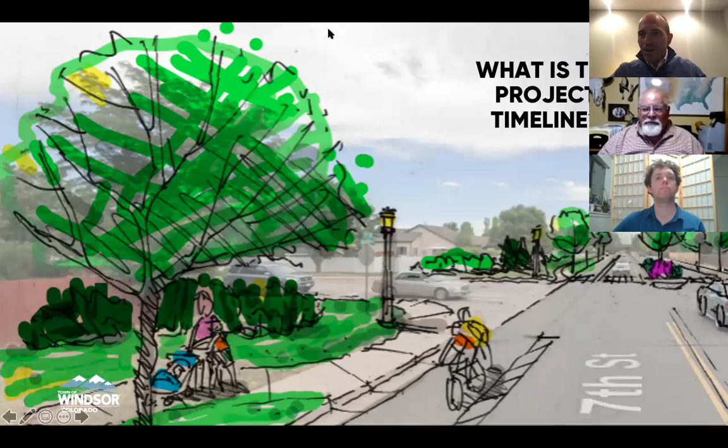Okay, so what is the timeline for this project? Carlos, what's going on with this? How long is it going to take? What are you doing? What are you not doing? So we have a schedule here. This is also going to be on the website, on the corner of the page, if you navigate to it. We just launched the project in August.

So we started in August, talking about goals during that session, starting to get existing conditions, and starting to talk about the measures by which we'll evaluate the ideas that come up during this project. We moved into September and really started thinking about options, ideas, and existing conditions for the corridor. We're doing that tonight with you. We're talking about your experiences. We want to hear from you about what it's like out there. What have you seen change over time? What would you like to see changed in the future? How are things going out there?

November 9th, which is a Monday, we're meeting with the town board to give them an update on the goals for this project, what we've heard from the community, and the existing conditions.

From there, after November 9th, we are working all of November and all of December on ideas and options. At this point, we don't have any options available. We haven't designed anything yet. It's premature to do that because we haven't heard from you, the community, and we don't have all of the existing conditions information yet. There have been some posts on social media about ideas and solutions we supposedly have, but we are far from that place.

We will be at that place in December. We will have another set of meetings like this in December, where any preliminary ideas we have will be previewed in this venue and format. Then we'll hear from you about what you think. And then we'll have another meeting in January where we show you the refined designs based on your input.

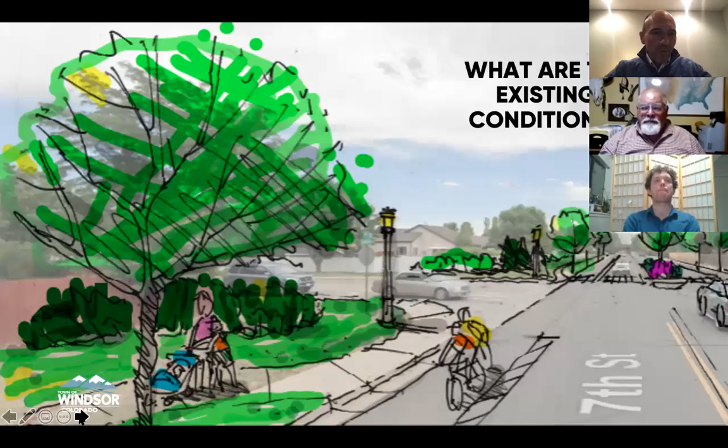So with that, now you are all reasonably versed in the timeline and what's going on. A lot of that information is on the website as well, so you can go check it out, and you can also replay this video if you wanted to know more.

What we're going to do next, for about 15 to 17 minutes if we're good, is go through the existing conditions in the corridor, and then we're going to ask you some polling questions about those existing conditions. Remember, during this existing conditions presentation, if you have questions about anything you see, feel free to add them into the question and answer think bubbles up at the top.

And Paul and Bill, I just want to make sure you can hear me okay and you can see the slides okay — they're presenting through. Thumbs up. Cool.

All right, so I think it's important with a corridor study like this to start with the history. And it's really interesting because this corridor has been changing for over 100 years. So there's been a lot going on.

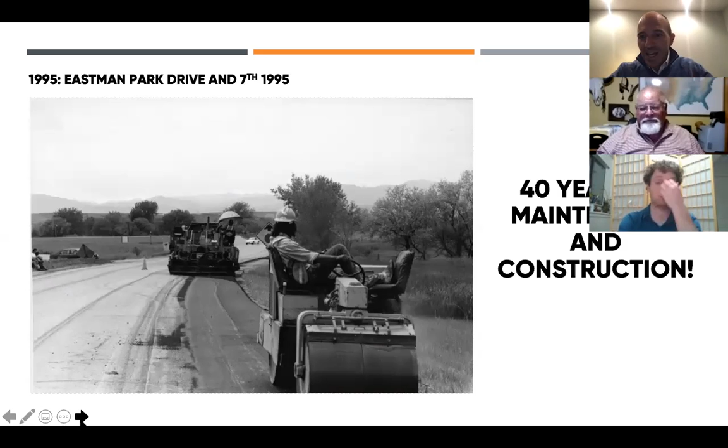From the 60s up until about the mid 90s, you see a lot of those visions being implemented. So in 1995, some new paving going on down south, and a lot of maintenance and construction occurs. That was a quick summary of the last 100 years of a lot of change, things moving and evolving in a way that there was a lot of debate about. I presume moving forward with this project, there'll be that similar kind of conversation - it's normal, it's not the first time that's happened in this corridor.

Our anchor for what we're doing moving forward is the Transportation Master Plan. I'm not sure if anybody on this webinar participated in that, but it was prepared over the last year and was actually adopted right before COVID really got going - adopted in March of this year. It will guide the next 20 years of transportation investment in the town. A couple of graphics on that so you know about this, and FYI, the Transportation Master Plan is on our website - you can get to it, download it, it's a PDF, reasonably easy to read.

In that Transportation Master Plan, the most important thing recommended as a priority was safety. Regardless of any mode of travel, the number one goal is that everybody gets home, everybody gets to work, everybody gets to school, everybody gets to the donut shop in a way that is safe and allows them to enjoy this community. That is a fundamental goal we are going to pivot from. There are two other things that showed up in the Transportation Master Plan worth noting: it's worth noting that our area, the 7th and Main area, 7th and Walnut areas, were noted as pedestrian priority zones.

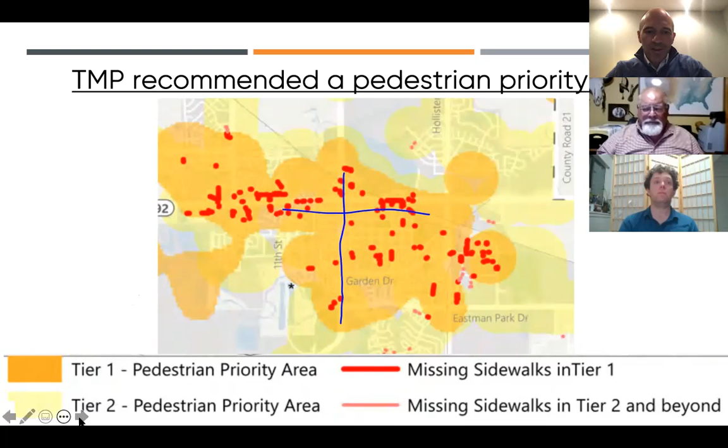So here's 7th Street here, and then the Walnut corridor is kind of living in there. We don't have too many missing sidewalks in our zone, but it was designated in the Transportation Master Plan as a pedestrian priority area.

The other thing noted in the Transportation Master Plan was new bike lanes. It was recommended to have bike lanes on 7th, and that Walnut Street corridor have new bike lanes, and possibly bike boulevards along Walnut. In addition, there could be a connection up to Main and some form of bike connection near Main. So the Transportation Master Plan was a little bit clearer in terms of these corridors and designs they wanted to see move forward.

Why is that important? Well, Main Street's the key to life in Windsor. A lot of things that happen in Windsor happen along Main Street. Donuts and food and schools and great burgers and paint and coffee and haircuts, everything we love to do lives along Main Street.

In addition, a lot of the population lives in this zone that's, as a crow would fly, walkable and bikeable to these spaces. That doesn't mean everybody's going to do that, or that you have to do it for every trip. But there is a lot of Windsor's population, a good half of it, that lives a really short distance to all these things going on.

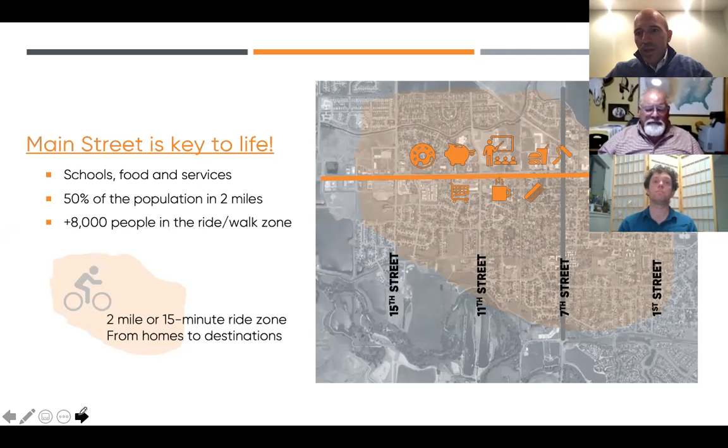And so the Transportation Master Plan said 7th Street and Walnut Street should be connecting to these areas.

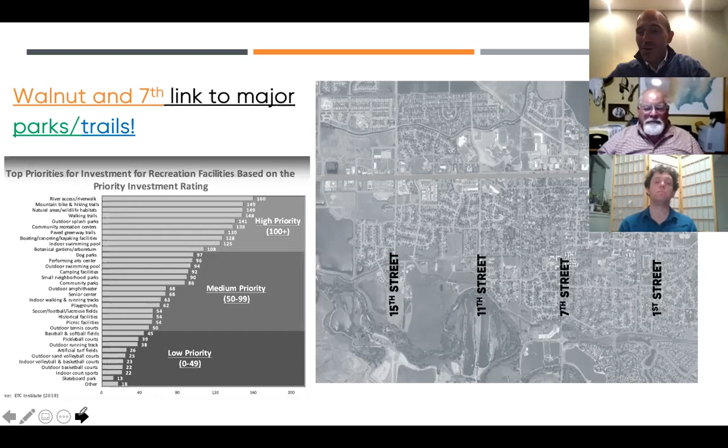In addition, if you've participated in the recently adopted Open Space and Trails Master Plan, you'll see two of the top priorities, really four of them, are access to the river walks and natural areas, being able to ride your bike, being able to walk and get out in nature. This was before COVID, so even more so now people want to be out. You have these two great regional trail connections and these great public spaces to be in, but you somehow have to get there from these neighborhoods.

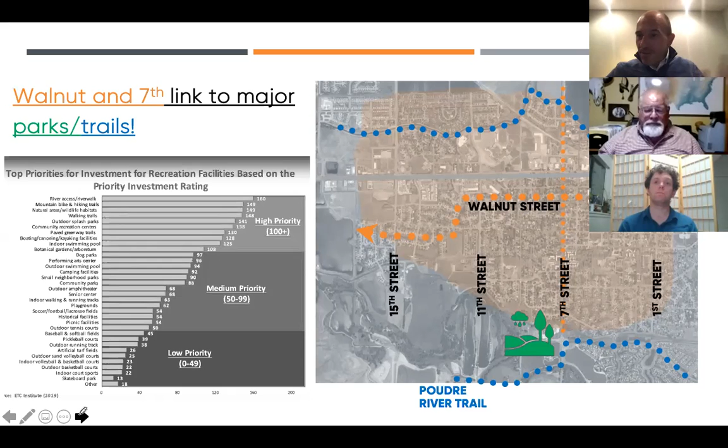So if you look at a third of Windsor's population and where they live, and then the preferences not only from the Transportation Master Plan but from the Trails and Parks Master Plan, people are saying we want to be connected, we want to get to these spaces. So 7th Street and Walnut Street are absolutely critical to make better connections, to make them safer, and to ensure everybody has a space and is paying attention to one another while they're out there.

So here are the high level points, and then I'm going to pass it over to Bill, and he's going to jump into details. If you love the bullet points and want to stay at the high level, these next two are for you. If you love all the details and want to see all the numbers, Bill is going to make your evening because he's going to show you all those good facts.

So what about 7th Street? On the high level, 7th Street is posted 30 miles an hour. We're going to show you how fast, or how naughty or good people are with that, in a minute, but it's posted 30. There's no protected place to ride in the corridor. So if you wanted to ride north or south to Eastman Park to get a donut, or get that paintbrush for your project, or just go to a music concert, there's no place to ride in that corridor. The sidewalks are there, but there's no buffer.

Paul and I were out putting those signs in the ground that you may have seen on 7th Street, and when you're standing out there, the sidewalk's right next to the travel lanes in some cases. It's near parking in some places, but some of the parking isn't as utilized, so you're really feeling a lot of the vehicles as they move by. If you want to walk and cross the street, sometimes you have to walk a couple blocks in either direction to make that crossing because the crosswalks are infrequent.

There are a lot of crashes in this corridor relative to Windsor—Bill's going to talk about that, so just be aware of it. We talked about the connections to open space and downtown, and the mayor talked about that in the video. 7th Street's the lifeblood—it's been that way for 100 years, as we learned about tonight.

And more importantly, we think that this is a corridor that has a lot of different unique neighborhoods along there that should be celebrated. And then lastly, for my part, Walnut.

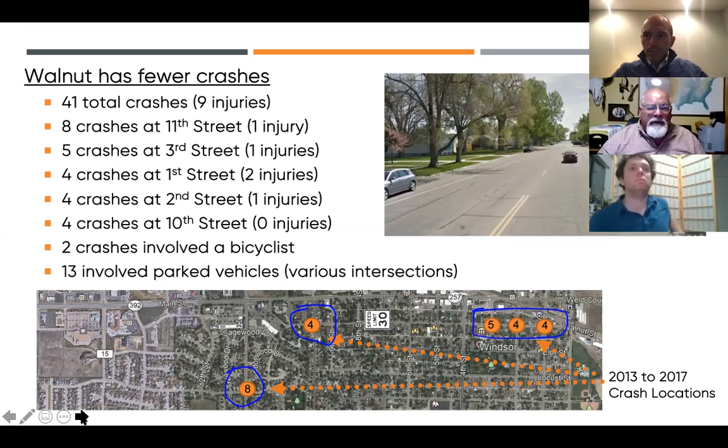2 of the crashes involved bicycles in this corridor, and one interesting thing was 13 of the crashes involved parking and parking maneuvers and parked vehicles. And that's maybe not a surprise given some of the angle parking and the demand for parking that occurs, particularly east of 7th along Walnut.

So how about traffic? We're going to talk about daily traffic and then a little bit about peak hour traffic. Over the course of the day on 7th Street, there's somewhere between, say, 8,000 and 12,000 vehicles a day. That, depending on your perspective, is either a big number or a little number, but when you think about the capacity of this roadway to carry traffic, it's probably somewhere between 15 and 20,000 vehicles a day. So we're not near capacity, and it's important to note that this roadway is not going to need to be widened for additional automobile lanes in the future.

We measure traffic delay or traffic operations using a concept called level of service. We give it a letter grade like a report card, A through F. The overall intersection has a level of service C, which is pretty good, but we know the northbound left turn is in the E range, so very congested trying to turn left.

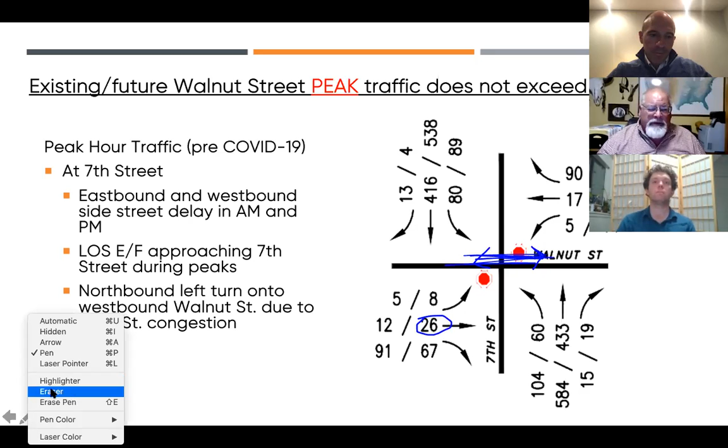And what are they doing? The Stone Mountain folks are probably going over to 11th to get up to the traffic signal at Main Street, or get to the school, or whatever. But they're diverting off of 7th because it's easier to go on an alternative route. So we see those diversions happening.

As far as the speed in these corridors, we measured the speed over a 24-hour period at a number of locations on each corridor. What we saw on 7th is that south of Main Street, the speed limit is 30, and yet the 85th percentile speed we measure - simply the speed that 15% of folks are going faster than - tends to be 6 miles an hour over the speed limit. That's an indication to us as traffic engineers that you probably want to think about ways to mitigate speed in that corridor.

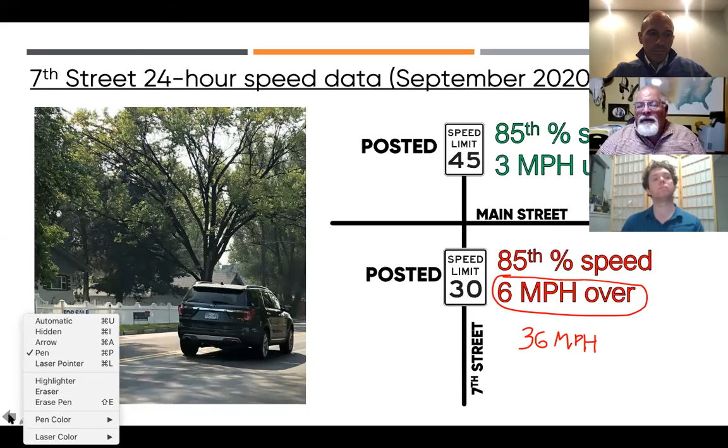North of Main Street on 7th, there's a different condition. The speed limit actually is 45, and people were actually driving less than the speed limit, which indicates they didn't feel like it was a corridor where they should be or needed to be traveling at 45 miles an hour. Then on Walnut, similar - 25 miles an hour on the west end of the corridor is the posted speed limit, 30 miles an hour is the speed limit east of 7th.

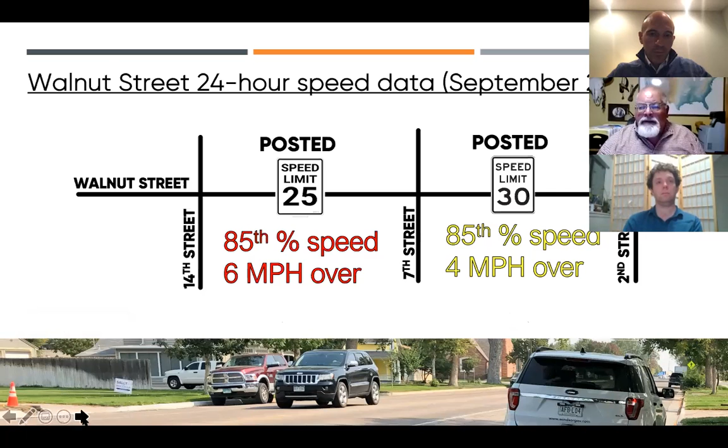On the west end, we saw that 85th percentile speed as 6 miles an hour over the speed limit, 31 miles an hour. On the east end, we saw the 85th percentile speed only 4 miles an hour over the speed limit, but it's 30 to 35 miles an hour in a corridor we want to think about as a comfortable pedestrian and bicycle corridor. So speed is an issue as we think about the designs going forward.

And then just from a bike and pedestrian standpoint, we don't have a lot of detailed numbers for the corridor. We were intending to get those mid-COVID, and that didn't happen, so we don't have detailed information at each intersection.

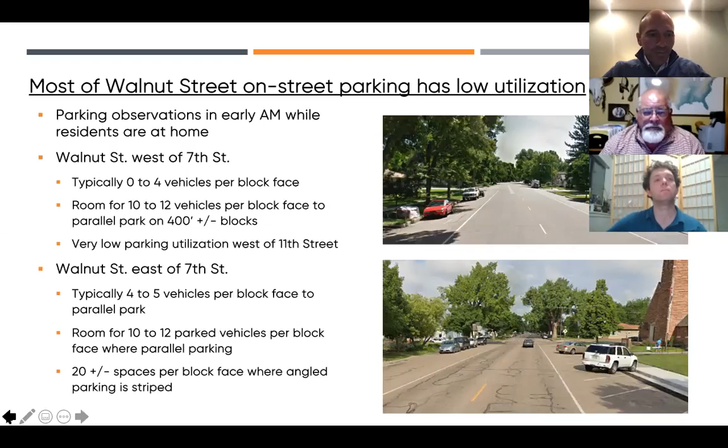The first question for you on Walnut is: when you heard Bill and I talk about the Walnut Street existing conditions data, does it match your experience when you're out there walking, riding, driving, doing whatever you're doing out there, does it?

So first one, yes, a lot of it reflects my experience. Second one, yes, some of it matches my experience. Third one, no, none of this matches my experience, since you're all on Jupiter. And then the last one's, I'm not sure yet, I probably need some more time.

So I'm going to give everybody about 30 seconds to think through that and process that. And then I'm going to end the poll, and then you can all see the results. So we have 9 of 14 people who've contributed to the poll at this point, so I can give you another 15 seconds.

Great, thank you everybody. Okay, I'm going to close the poll, and I'm going to share the results. So sounds like yes, and not everything yes, but pretty close to everything yes.

Okay, that's good. So I'm going to ask you the next question. The next one is, do you agree with the existing conditions data? This is important because when we go forward with the town board, we all have to have a similar set of data points to use to make decisions, right? So the question is, do you agree with this data? Is this data that we should use moving forward in the process?

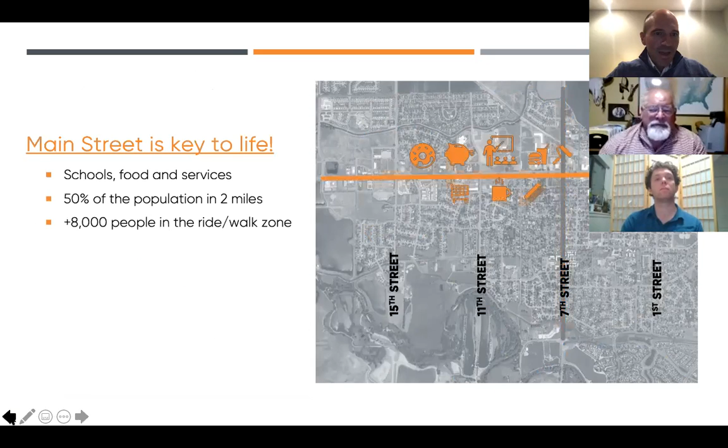Another one says, are you saying that the bike paths will be put on Walnut? So the transportation master plan, I'll go back to that slide for a second. The transportation master plan suggested that Walnut Street has bike lanes. Too many windows open here. So there's existing bike lanes on Walnut Street. They end around 5th Street or so.

So those bike lanes end today. The transportation master plan said, what if you extend those, starting to move west? Once you get west of 9th, what if you went up to Main, or what if you kept going on Walnut? So the transportation master plan left that to be determined, but said those are thought to be recommended there. This process we're going through is trying to figure out what the design is actually going to be. So that's where we are. We're not saying anything yet. We're just showing you what the previous plans have said and trying to get a handle on what's going on out there.

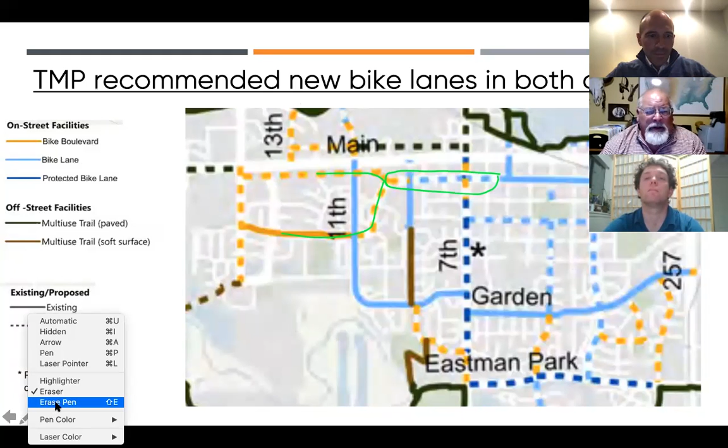Carlos, a couple of new comments. We have concerns about diverting more traffic through Walnut residential areas. That's certainly a concern, and we hear you. Another one was, are you considering affecting parking on Walnut? I do not have a driveway and need to park there, plus the churches need it, and so do the residents at the apartments between 5th and 6th.

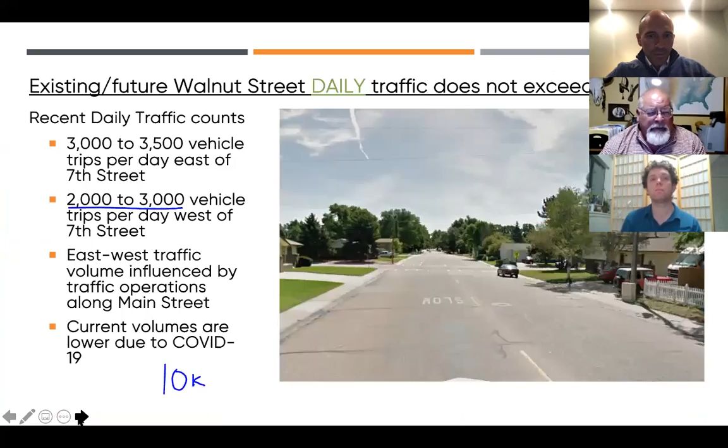I'll read one last one. I live on Walnut Street and see high traffic at times due to Main Street congestion. Are there any plans to reduce truck traffic on Main? Okay, so these are great, we can turn those into, that's an issue you have. We don't have any plans yet. We are literally just at the beginning.

We're hearing what your experience is. So if I was going to, and I hope I don't speak for you, let me know in the chat if this makes sense, but I think I would turn those into: I live along Walnut Street, I see high traffic during times, I'd like to see truck traffic reduced on Main. I'm going to make an assumption there that would happen.

On the next one that came in: I'm concerned that traffic on Walnut Street will increase. So, I'm concerned that your designs will increase traffic, and I presume when you say traffic you mean motor vehicle traffic. But can you clarify if you mean you're concerned that more people will walk or bike on the street, which I don't think is the case, but I just want to clarify when you say more traffic, I presume that means more car traffic.

Bill, there's another one down at the bottom, a couple new ones. Yep, and there's, let's see, I lost it now. Okay, thank you, Cindy, thank you for clarifying that.

Paul, can you speak to the one about the grocery store anchor and traffic? Sure, are there any plans to anchor a grocery store on the east side of town? It appears the increased traffic on Walnut going west off 11th Street is because everyone is using Walnut as a thoroughfare to get to the grocery store. I don't know if you want to respond to that, Carlos, but I actually want Paul to respond to that one as town planner.

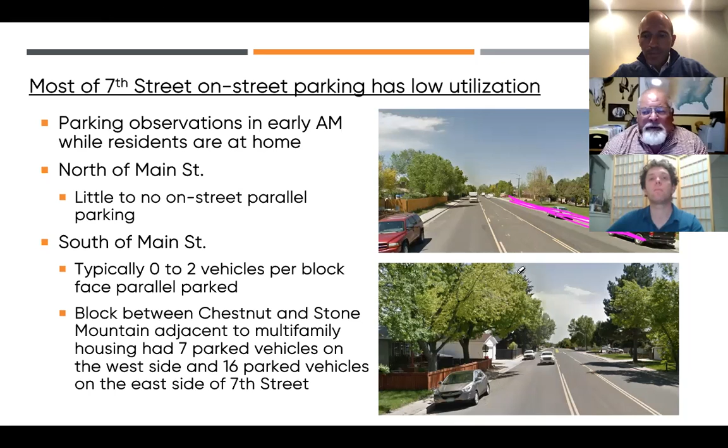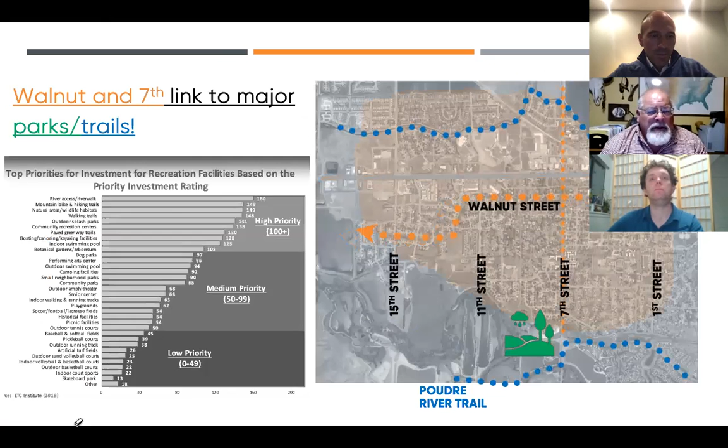We see the comment that churches really need parking on Walnut, and we certainly agree. We've heard that loud and clear through other public meetings, and we've been in contact with folks representing churches in both corridors. Another comment said that on Walnut east of 6th, the time to look at parking is not 5 a.m., since many churches and houses have no off-street parking. We did the parking count at 5 a.m. to quantify those parking on street who live there, but we understand that's not the only time parking is a concern.

On Wednesday, we had one of the churches represented, and we've sent emails to all the churches in both corridors for their input and feedback. Parking has been at the top of their list, so we understand that, and we're going to make sure it's considered in the designs.

Someone asked me to put the Walnut Street slide back up. If this isn't it, let me know and I'll find the other one, but I think this is it. We can do another minute of questions and answers if anybody has more, and then we have one more exercise to go through to keep everybody on track for the hour timeline. Bill and Paul, can you scroll back through the questions to make sure we didn't leave anybody behind?

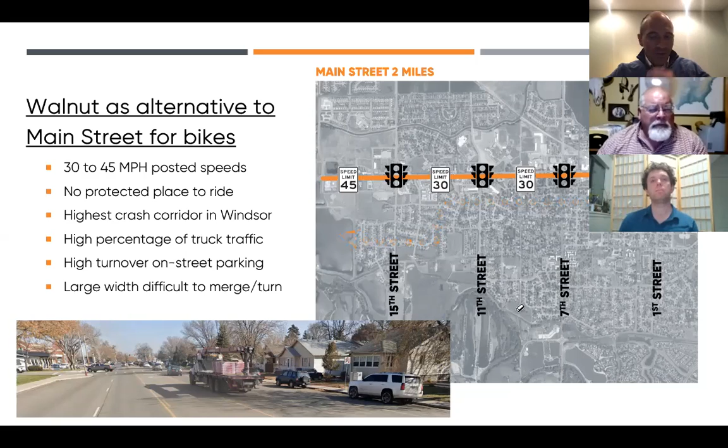We can obviously go back to this, no problem, if you think of other things as we move ahead. In the interest of everybody's time, I'm going to fast forward to the goals section so everyone has a chance to weigh in before we hit our hour mark.

So we are going to talk about goals for a few minutes here. The idea is that we set project goals in the beginning, before we start designing and doing anything, so we know how to evaluate the project and keep everything moving forward.

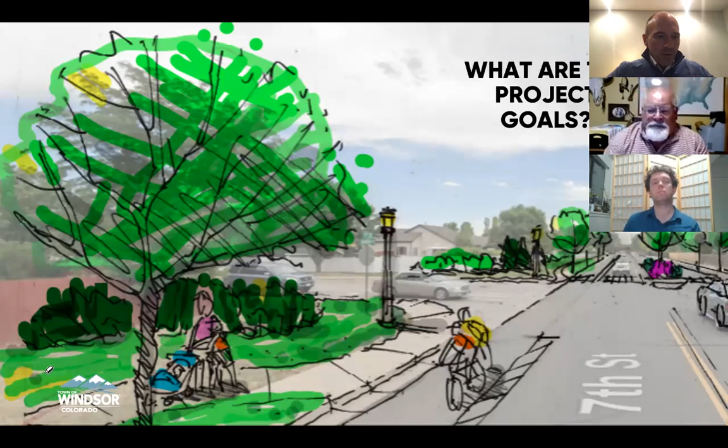So what are goals? Why are we doing this? Goals are really high-level aspirations—things that one day we want to achieve. They represent long-term ideas. I know it's hard in a world that's quick and on-demand, but as planners thinking about the future, we need to make sure these are long-term. Remember those pictures from 100 years ago and 40 years ago—time continues to move on and things change. As planners, although sometimes unpopular, it's critical for us to think about the future.

These are long-term ideas that hopefully aspire to the things in the Transportation Master Plan. So we've drafted a series of goal statements for the 7th Street corridor and the Walnut corridor, since you've learned they're kind of different corridors with different ideas thought about previously. I'll show you both, talk about each for about a minute, and then ask some polling questions on them.

So the first one is the 7th Street goals. The first goal outlined is to create a safe and efficient corridor that's friendly to all modes of travel. The idea is that it's safe and efficient for everybody to move along it—whether you're walking with a grandparent or your child, or on a scooter with your kid in one of those push scooters.

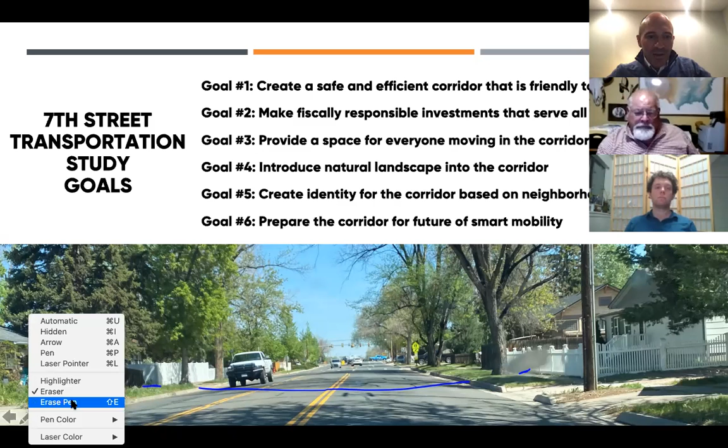The next one is about introducing some natural landscape into the corridor. This is probably the better example of natural landscape being in the corridor—you have a lot of trees, some side lawns for grass. The natural landscaping not only softens the noise in the corridor, it absorbs some of the sun, providing shade, and it actually absorbs some of the carbon coming out of the cars, believe it or not. So this is a place where landscaping really helps soften the environment. As you go further south it gets kind of harsh with a lot of concrete, and particularly when it rains a lot—during spring storms or the monsoons in August—you get big flows of water because it's so hardscape. So introducing some of that back into the corridor is a goal.

Fifth goal is to create an identity for each neighborhood. There are unique neighborhoods along this corridor, but you wouldn't know it because there's no signage, no change in how the street reflects those neighborhoods. Some communities, Loveland being one, are taking these long corridors and telling stories of the past—using signage and memorials to talk about war heroes and pioneers in the community, enhancing what the corridor means for everybody traveling along it.

And finally, this one is a planner's goal—we think it's important, but we're open to all these comments. All of this is going to town board as goals in November. The idea is to prepare for the road ahead with smart mobility. If you remember those articles from 100 years ago about Model Ts sharing the road with horses, that same interaction of technology holds true for the world we'll all live in over the next 20, 30, 40 years—our roads will be shared with a lot of different technologies. So if we're making investments in this corridor thinking ahead 20, 30 years, that turns out to be fiscally smart now, like buying something that could cost 5 times more in the future if we delay. That's smart planning and investment, thinking about the future of smart mobility. So that's the sixth goal, and I'm going to rewind back to those before I ask you questions.

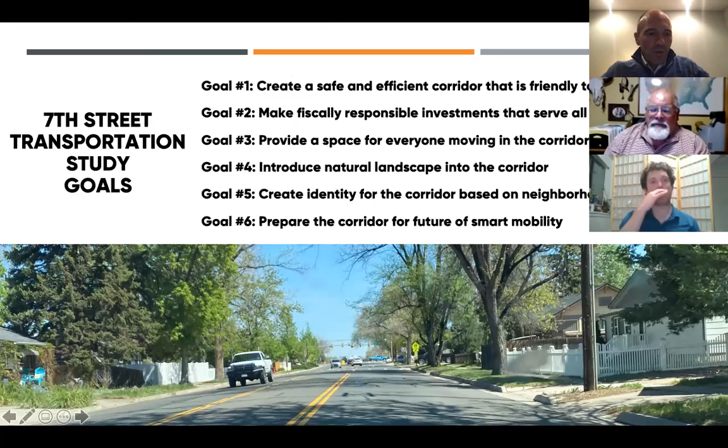The last comment says no goals address the needs of residents on these corridors and what effects they will have on property values. Good point, let me think about that. Let's go to the Walnut ones. We say neighborhood character, but we don't specifically say property values, so you're correct - we don't say they should maintain property values as a goal. But I'm picking up that we should not have any negative impact on property values with these investments, and we should address the needs of residents on these corridors.

Some residents have weighed in and participated. The last couple nights we've had people who live on Walnut call in to town hall and provide comment on the project website who live in the corridors, so people have told us some of that. I would not say we've heard from everybody, nor that we know all the needs. I think you're accurate in calling out that we're just at the beginning of this, but I wanted to note we've heard from some - maybe 5 to 20 of the 60 people who have participated live along the corridor directly. We don't have everybody's addresses, we just know from the comments they've told us. It could be higher, but we're hoping you could spread the word and let people know what's going on - we'd appreciate that.

There was one other question: any chance the speed limit can be reduced on Walnut between 11th and 15th from 25 to 20, since folks are already speeding? I'd add that changing speed limits, particularly from 25 to 20, will have to be part of a bigger conversation with the city - a citywide issue about how the town wants to proceed relative to changes to speed limits.

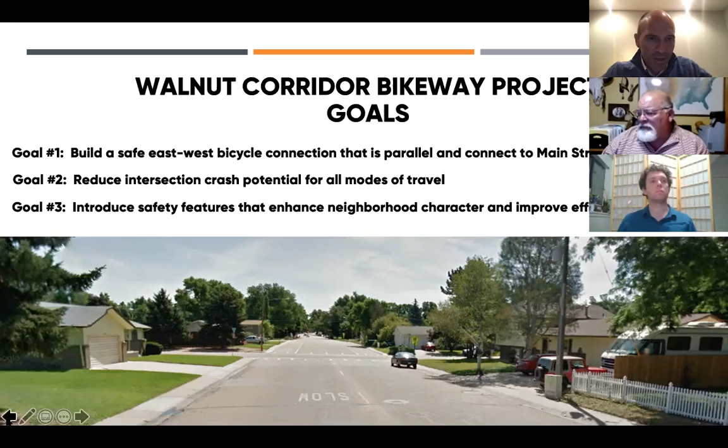Has turning left on 7th Street been addressed? Let's go back to that slide - Bill, your magic slide here with all the data, maybe run through that one more time. This slide talks about turning left, and the question was about turning left onto 7th, as opposed to off of 7th - that's maybe a different question. If the question was specifically how do you get onto 7th, that's an issue depending on which intersection you're at and what the traffic control may be. We are looking at, and intend to look at, alternatives of traffic control at intersections along 7th.

The keyword there is that nothing has been addressed yet - all we're doing now is trying to understand existing conditions and hear about people's experience. Cindy, could you tell us a little more - are you asking because you have difficulty making that turn and you'd like to be able to make it? I'm making an assumption there, but could you let us know in the chat more about that?

Next one from Lisa: can you please clarify if the Walnut plan is to increase traffic east-west? Well, there's no plan yet. There's an idea for Walnut that was in the transportation master plan, identifying bicycle facilities and making the street safer for people who want to walk along it. That was identified as a line on the map, so there's no specific plan yet - it's just an idea.

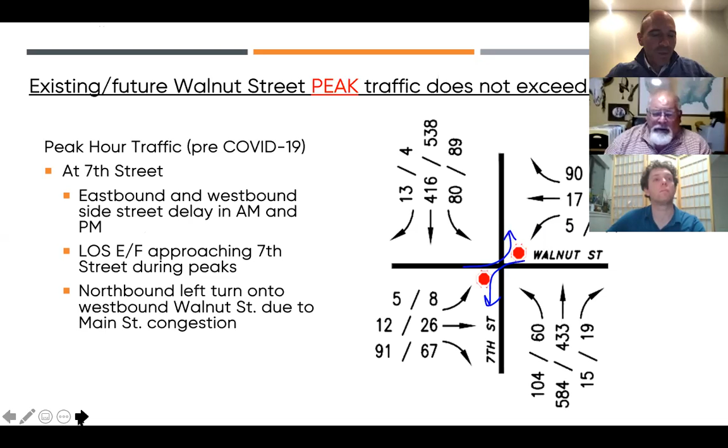Bill, do you want to take the next one from Doug? Sure. Would it be wiser to put the bikeways on a parallel street to 7th Street? Let me get the map up. That's an interesting idea, give me a second to get the right visual here.

So the idea that Doug's saying here is, what about 9th? Does 9th go through, Paul? I don't know that street very well. Is 9th a connection through down to Stone Mountain? No, I don't think it connects.

One way to answer that is none of the parallel streets have as good a north-south connectivity as 7th. So if we could figure out how to make 7th Street a good place to be a bicyclist, it has the advantage of the best connectivity in town to go north-south, and it extends south of the roundabout and goes north of Main Street on the north end. Yeah, it's a good point, Doug.

Since we've been talking about Walnut as a parallel to Main Street, I think 7th Street's definitely not like the size and volume of Main Street yet, but it definitely has more traffic, right? Bill said 15,000, 10,000 vehicles. 12,000, 9 to 12.

So I'm putting it on the list. I think it'd be something we should obviously consider, like what about some of these other parallel streets? So Doug, thanks for that comment. Thanks for all your comments, and for hanging out and doing this.

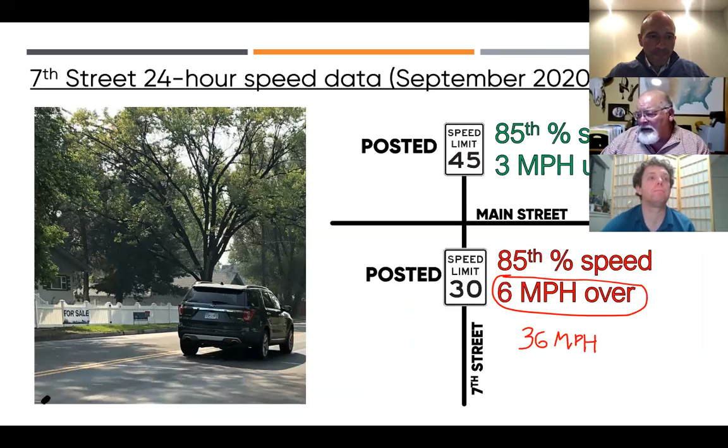Is there anything else that we missed that we need to get through in comments? There's another comment about the difficulty of turning left onto 7th at Stone Mountain and at Chestnut onto 7th. We hear you loud and clear, and intersection operations along 7th certainly will be considered as part of the alternative development process.

That's that Z movement from Stone Mountain, or from Garden up to Stone Mountain, and probably Garden to Stone Mountain is one of the issues we've been asked to look at, the Z movement that occurs there. I see it now, it's in the chat, turning left onto 7th. Got it, so getting onto 7th.

That also came up, I think, at Walnut, this notion of how do you get on from the side streets onto 7th. I'm going to give everybody just another minute or two here if you wanted to weigh in on anything else.